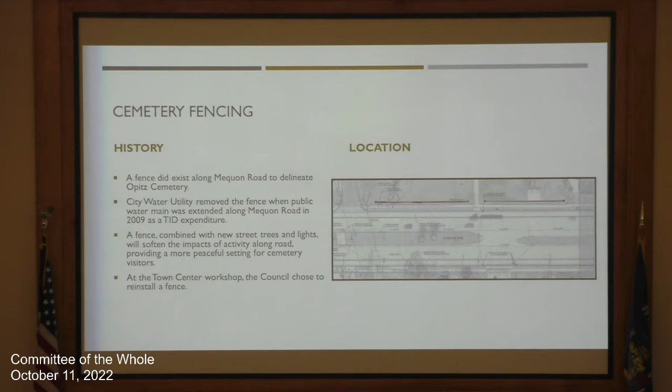As part of our workshop last year, the council, there was consensus to replace the cemetery fencing that was removed at the time that we extended the public water main back in 2009. The TID made that expenditure for the water main. There will be a fence along with new street trees, street fixtures along that street edge, and certainly that'll help delineate that portion of the block that doesn't otherwise have buildings on it. But as part of the workshop, I think there was consensus that for those visiting the cemetery, it would be really nice to have that barrier and buffer again of a fence.

There was, I think, some suggestion at that meeting that we do something a little bit different than our existing town center fence, that we use maybe an ornamental version of that. I did reach out to multiple people on the Historical Society, the library, to try to find an image of a fence in Mequon. It's not reading great on here, but the left picture is actually Freistadt, and it's across the street from where the hardware store is. So it's by Trinity. There's a little fence there on the corner.

This is back in the late 1800s. It was a wood fence. On the right, I think, is an example of kind of that vintage ornamental fence that you would typically see back in that time, at cemeteries. So we worked with a fence company to look at the option of what an ornamental fence would look like that would still be somewhat consistent with our existing fence. I just provided, just in case, sometimes these are hard things to look at or point out when you're driving or walking through, or to recognize, but there is implementation of that fence both in Mequon and in Thiensville.

Along similar lines, walls and railings, we have a very large and long retaining wall along Mequon Road on the north side, obviously adjacent to Spur 16, with all of the other infrastructure and greening that we plan to do on this corridor. We don't want this to look leftover and dated.

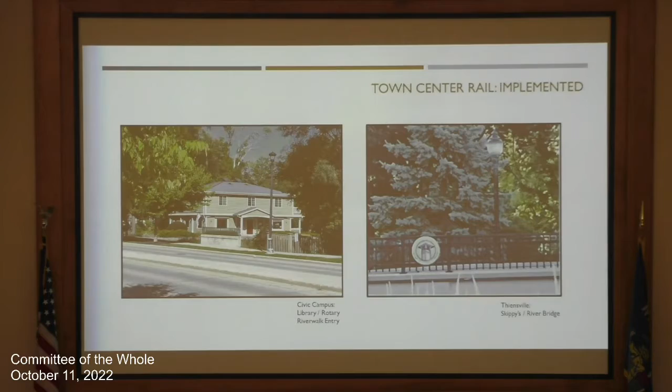So those are really just the walls and fencing. If the council would like to comment on that. Are there any comments on the fence?

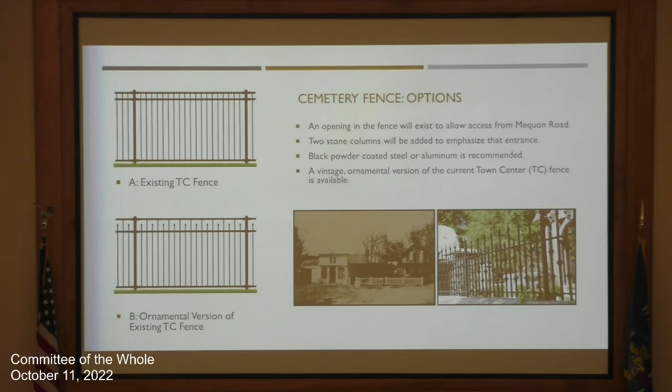Are you just picking between option A and option B? Yes, if someone has another idea and there's consensus on it, I'm happy to explore that. Let's keep it simple. We reserve the right to do that once in a while. Two options, right?

I vote for A. I vote for B. Of course you do. Okay, straw poll. Who likes... A is used in other places currently. I guess B is a good question too. Is it significantly different in cost? It doesn't look like it. No, it's not significantly different in cost. Do we just do it by the cemetery, or carry it throughout?

The ornamental one would go along the cemetery, and the rest we'd implement as the existing town center fence. The street frontage along the cemetery is just under 300 linear feet. Really, the cost difference comes between whether we want aluminum or steel. The fencing company recommends steel just because of all the lawn equipment. So this is in the price range of somewhere between $15,000 and $25,000 for the entire linear frontage.

The steel is more expensive. So am I correct in saying we'd have more consistency throughout everything if we went with A, but B is a little more ornamental for the cemetery? Correct. Okay, who likes option A? Show of hands. Let's go option A, because I'm practical.

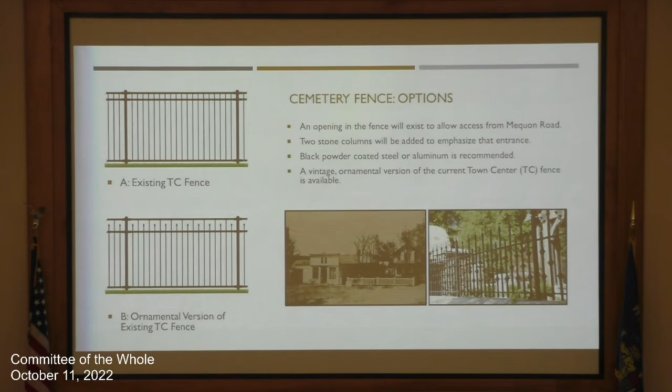Alderman Meyer: my only concern with B is that we have people who put their kids on top while holding them, then pulling them off. I don't know what the distance is between the arrow on top and the rest, but that's a little concern.

Should they be doing that at the cemetery? Well, just getting caught on it coming off. It's better than the old one on the right. You're going to get skewered there—that'd be worse. So this fence is in the 4 to 4.5 foot range.

Looks like we've got a consensus for incorporating something resembling option B around the cemetery. That's okay, so we made a decision. Right, on to the next one.

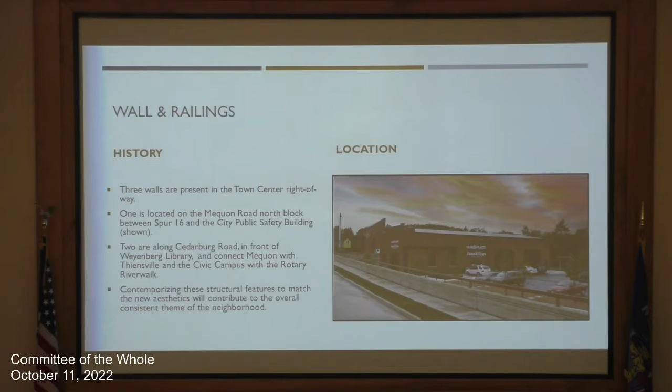So we debated a couple of different options for this. We talked about even looking at installing planters on top of the concrete cap for landscaping and vines to come down it. That can always be added if we choose not to do the guardrail. We do have some height and spacing limitations with the guardrail, from a safety standpoint of falling off the other end, which made the planters more complicated.

And if Kristen's still in the room, she wasn't super enthusiastic about the added maintenance. We kind of joked in our office that each of us planners would take a week in the summer to take care of the planters, with a contest at the end.

No, so we're looking to add that stone veneer. If there was to be prioritization of where to add the stone veneer, I would definitely choose this and the bridge location over the one at Division Street. But there is a Thiensville entryway with some stone right at Division Street as well that matches this look.

I think the stone looks sharp. I'm not sure what everyone's opinion is. I like it—it really dresses it up. I like it too, and that area currently is so singularly unattractive that it would really make a big difference there.

Did you say you would put lights on that, or no? We were talking about doing that at the bridge, but I do think that's an option here too, because I think that would make it more attractive.

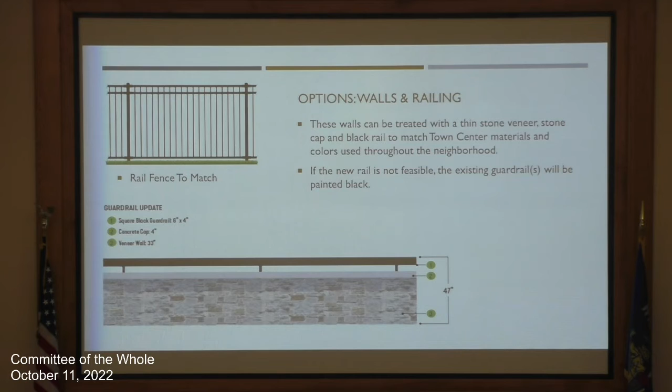I thought that adding lights there would highlight that area.

Is there a feeling on the planters? Kim mentioned she thinks they look nice, but could end up being a bit of a maintenance hassle. I think you're right, it might be a maintenance struggle, and an unkempt flower area is worse than none.

Does everyone sort of agree with that? Alderman Parrish? I agree with the planters. Depending on cost, I think Alderman Hanford's ideas would be interesting to see.

The lighting could look good there. Yeah, I agree, it could look really nice because that's a long stretch. And that's steel on the top, correct?

Really the same thing here. I guess I could have included this in the initial summary. Not much we can do with the bridge, it's regulated and permitted by WisDOT. Any structural elements that would add weight, including the median, since the median is actually part of the bridge, could result in a structural analysis.

So we're trying to look at really minimal, aesthetic ways to dress this up. Even if we pursued a different railing at this location, it would have to be a certain grade, WisDOT approved, because of the river. So the idea here was to keep the existing railing painted black to stay consistent with the rest, and then add a thin stone veneer since that won't add much weight.

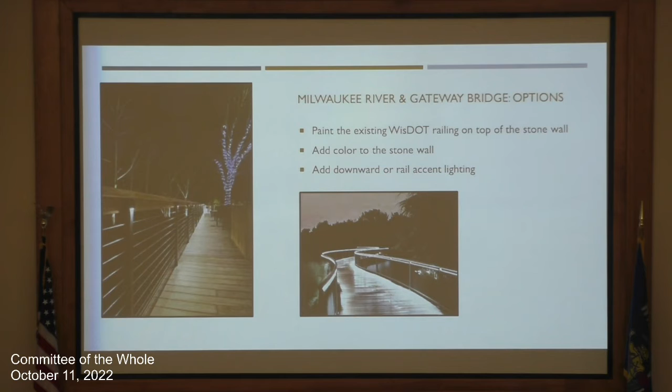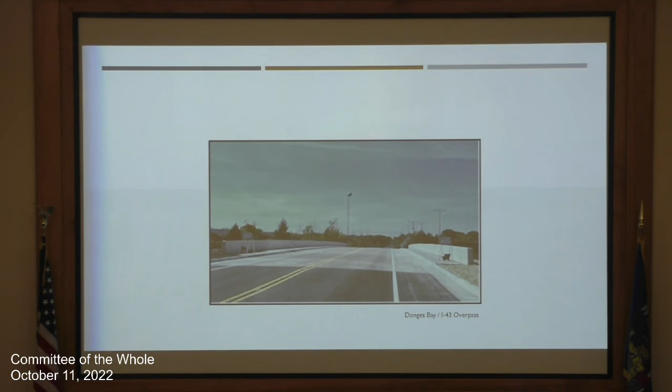As part of that gateway bridge, section number 1 is the concrete median. This is where we could do structural gateway and entryway features if we're not successful in adding anything green there. The existing median at number 2 is immediately to the west of that concrete median.

I think we've already done some planting there over the last week, and we can replace the very tall light fixture — you can see the two-armed one just below number 2. On section number 3, the grassy terrace area in front of Riverside, we can add our typical streetscaping pattern with street trees and a light fixture.

We should be able to dress up section 2 because it's already a grassy median, so that shouldn't be an issue with WISDOT.

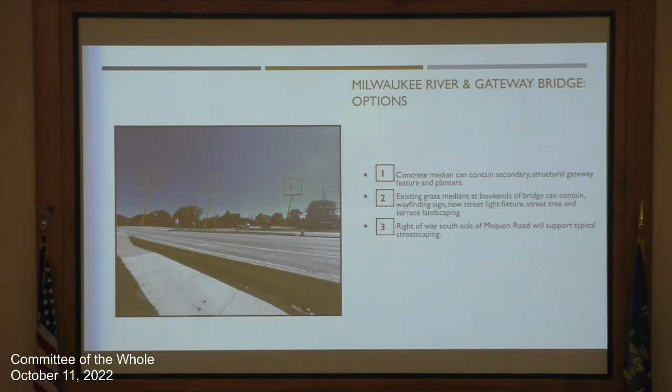Looks good. Is there any feedback, Alderman Parrish? Thank you. District 6 used to cover the bridge here, so I would get occasional comments that we discussed at Public Works maybe a year and a half ago, just about how to make the bridge safer.

And then we said, oh, we're going to be doing this a few years later, so this would be one time to talk about other things. I understand there are a lot of pedestrians on this bridge, and we're hoping more will go there, especially high school kids after high school, going on the sidewalk. Can you go back a couple slides?

That's good. You can see how close the traffic is to the sidewalk. It feels very close. There's very little we can do about that because of the DOT, but I wanted to suggest two ideas.

One was to install accent lighting bollards, one on each end, so in this case we'd be looking straight at one, basically not on the bridge but right on the outside of each bridge end. We can't do a fence or anything, but it would feel like it would create some separation.

We also talked about reflectors, which Dale brought up for this area along Main Street — how we'd like to do those here, but not on the bridge for a variety of reasons. And we talked about different types of paint, like reflective paint on the curbing, some way to differentiate, because there's no green or separation from the sidewalk to the road. Painting the curb could create some more separation.

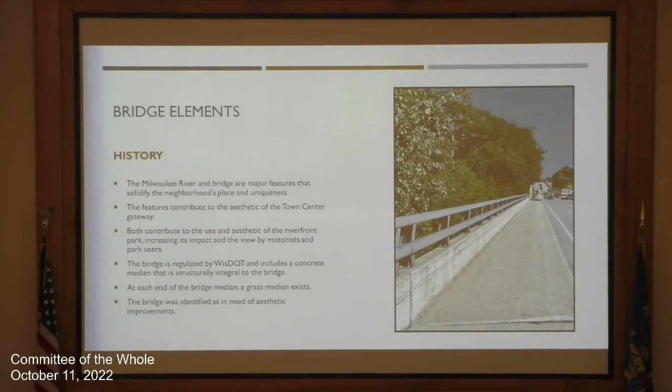Alderman Strelchak: Just wanted to say that everything you've come forward with so far has just been excellent. I like the veneer, I think it's going to dress up the city in multiple places, and I like that you're tying it in two different places, one within town center and one as you're getting to it. I support Alderman Parrish's recommendations on the bridge.

We do have paint on this subject, and we also have paint on an upcoming one that we're going to talk about in the crosswalk. I do want to caution you that paint gets very slippery in the rain, and it gets very slippery in freezing conditions. So as we're painting things, let's please keep that in mind.

I've been riding motorcycles since I was 12, and I raced off-road, so I pretty much know what I'm doing. The one time I did go down on a bike was at a crosswalk making a turn in a damp condition - it wasn't raining, it wasn't wet. It was a condition I didn't expect to be as slippery as it was, and it was a painted crosswalk. So as we're trying to create a safer town center, I would highlight that for other people.

Especially as you're walking across this bridge, if we do paint the edge, which I do support and agree with, I would recommend that on the flat surface it doesn't come in as far, because I'd hate to have somebody slip off of that and actually fall into traffic because of something we tried to put in place to make it more safe.

Alderman Meyer: I think that if we do get the lighting along the railing, at least at nighttime, it would help with designation on the sidewalk for Alderman Parrish's idea to highlight that over there, which I think is correct.

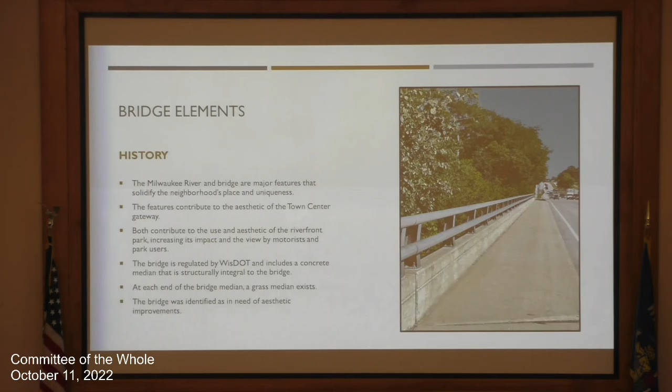This would be kind of a cool effect, hanging over the edge. I wonder if doing something along the river edge would get us a similar effect down in the riverfront park area, even though it wouldn't be up on the bridge - or uplighting from below.

I can have another round of conversation about that. Any more feedback on the bridge, or are we ready to move on to the next topic? Feels like we're ready.

Okay, so the OIT crossing, this has really been the impetus for being able to make some of these other changes, narrowing down the road. I think we all probably know what it looks like, but it kind of helps serve as a mid-block symbol to what I think the neighborhood's unique theme is.

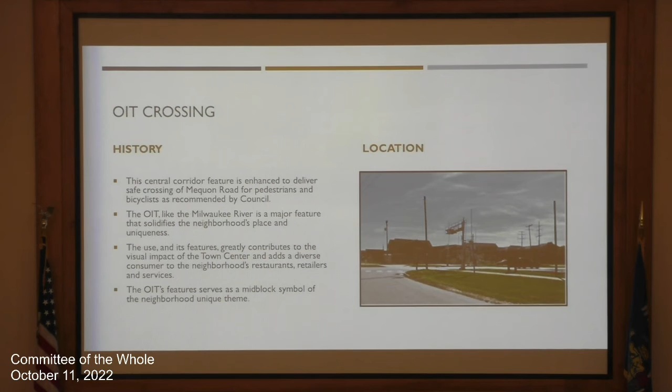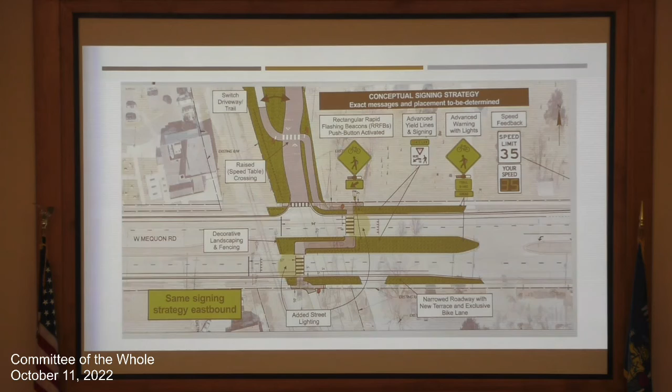And then we explored opportunities to provide a secondary, albeit smaller, gateway image to kind of hit that rhythm or element throughout the neighborhood. So two options that we looked at were this one and then the reverse of that. We did explore some that were vertical, but we were concerned about the vision both into and out of the crosswalk. And then we looked at some more traditional styles, but they were just too far removed from the gateway feature at the intersection of Mequon and Cedarburg Road. So really the distinction between these two that you're seeing is just that signage.

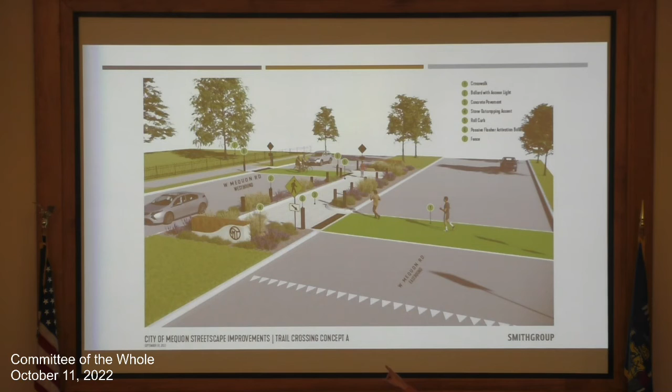So this will be option A, the one with the wood on top. Option B will have the concrete on top. Who likes option A? And option B? Looks like option A sort of went well. Dale's an odd man out, but whatever, that's okay.

Alderman Strelchek: just really quick, if we pick whatever option's shown here, whether that's A or B, that logo is really far down on there, and people are going to go through like, what kind of idiot would plan to put a logo right behind bushes. So as we're doing the landscaping, we need to keep that in mind.

I do like the other version, I think you just shift the logo to the left and still be on the rise, because it creates a bigger visual barrier for motorists as they're coming here, with the white being a little higher. But I don't care either way. We did talk about landscaping at the base. The other thing is that we are going to attempt to get a halo glow behind the logo as well. The lighting will be nice.

How do people feel about the crosswalk? Seems to be a little bit of momentum behind green, if it can be green and it's the right safe material or texture. Yes, okay. Looks like everyone's maybe kind of liking the green.

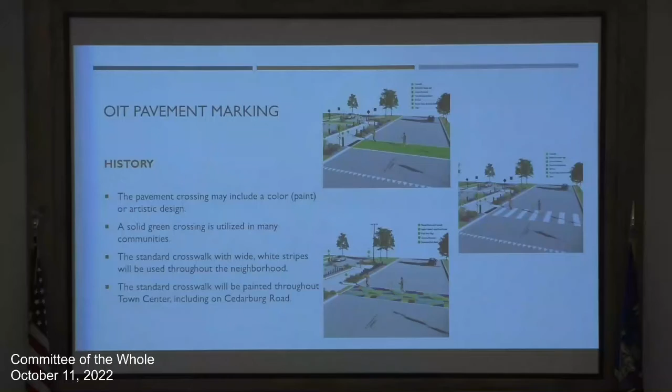This was the next one, after the crossing, just to show you the comparison of the three. I mean, I don't think we would do the artistic one on the bottom left, but that's just an example. I don't think we would use that pattern or that color, but it's just to show that you can do anything you want, there's infinite options there. I don't think we can handle that.

Yeah, we need a whole nother meeting. And it would get dated pretty quick, no matter what we chose. And the triangles would be part of it either way. No, you could do anything you wanted. I mean, I do like the triangles, I want to make sure those are included.

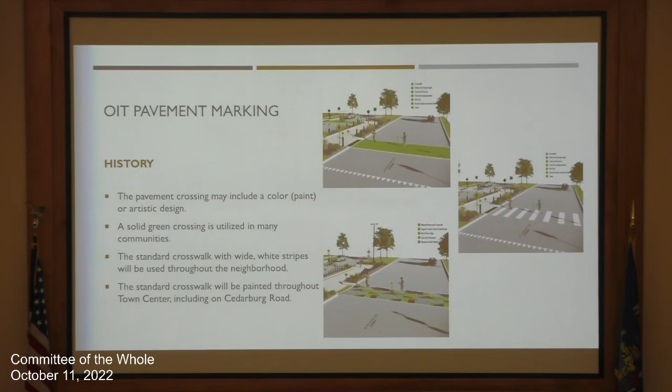Oh, I'm sorry, I thought you meant the triangles in the graphic. No, yes, yes it is, those are included. Good. So consensus is green, and then I think we had a texture decision, you can get it. There's a detail there to pick at, but I think it's an important one. What's next? Okay.

So what's next is the gateways. This will help you go back to the other one if you want to see anything different. This is on the corner of Buntrock and Mequon Road, on the southwest corner in front of Aurora, across from Foxtown Brewery. Here we would do a vertical element.

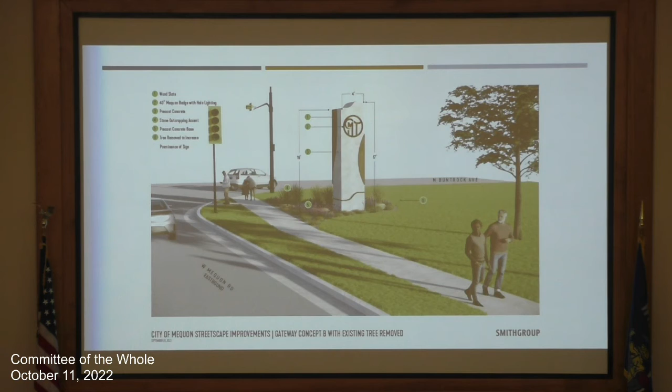These are the two that we landed on. The top one has a curved edge to the top and the bottom, and it has a similar stone veneer at the base, and obviously has much more concrete. This one, same thing, has the stone base, does not have the curved edge, and has the wood slats. Again, we would look to do a halo glow here behind the logo.

Was there any concern about too much massing on the street? It's just a very large structure. Jack and I went out there multiple times.

We took a measuring stick out there, and we have come down in the height of this since it was originally proposed. There's a pretty significant row of trees on that side, and when you compare that with what we expect to see as the traffic signal there, we've landed at somewhere between 12 and 13 feet in height for this. Okay, so it won't be 17. Yeah, perfect. 17 was a little high.

Is there any preference one way or the other between the two? Which one do we like? The one that's shown here has the wood more prominent, and here's B. So do we like the wood more prominent or the concrete more prominent? Looks like the wood is in the concrete. You would like the concrete, and we got one for the concrete.

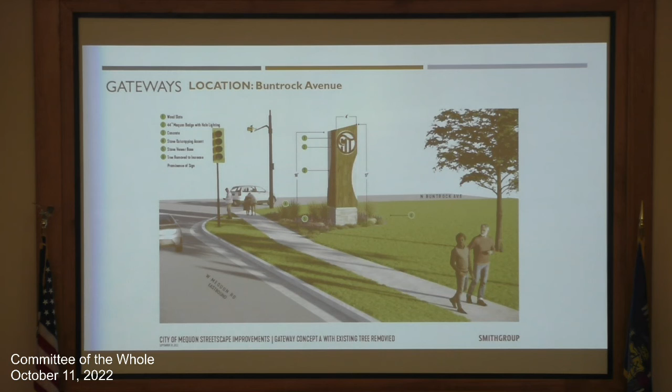Outpost has a wall with their pavilion out at the corner. We had secured an easement on that wall if we ever wanted to put some signage for town center or welcome, something like that, so we could explore that. I like tying something in there at that corner. Okay, so option A, this one is the choice, and duplicate that by the bridge.

Okay, what's next? Keep her moving. Okay, this is just a close-up of the other two signs. This is the example of the secondary one. So this one wouldn't be at the bridge because you like the other one better.

We were talking about doing a very smaller scaled one at the public safety building, really as you're exiting town center. Because as you're leaving the Mequon Cedarburg Road intersection, you'll see the one on the river. So this is one to kind of end cap as you exit the neighborhood.

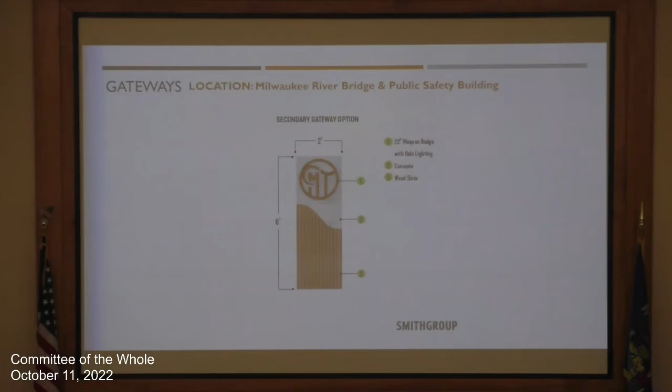So where is that again? This would be at the Mequon Buntrock intersection, on the corner where the public safety building is. On the Buntrock corner? Yeah, the Buntrock Mequon Road corner.

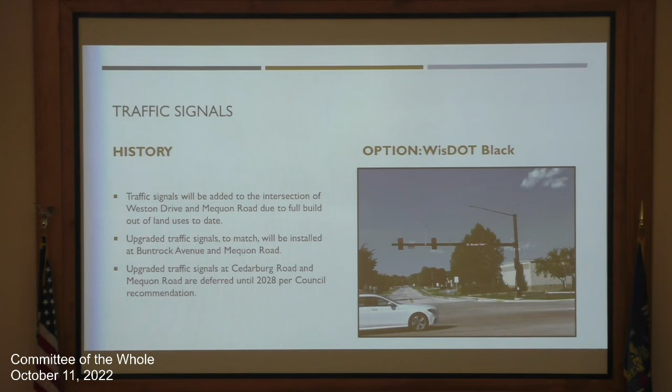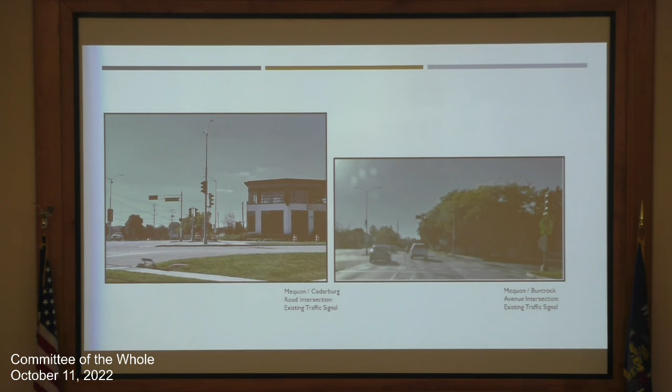This is just to show you what the infrastructure looks like at the existing intersections. At Mequon and Cedarburg Road, as part of the workshop last year, we deferred making any improvements other than enhancing the crosswalks at this intersection until the resurfacing project is done by WisDOT. We'll have the opportunity to upgrade these traffic signals at that time to match the rest of the neighborhood. We've always talked about adding brackets and banners to our new street lights. Cedarburg Road is an obvious location to do that, but I also think mid-block, or along the two blocks between Cedarburg Road and Buntrock, is another good opportunity to do something like this.

Perfect. Is there a consensus for these? Yeah, that's a good addition. Go for it. I think we're almost there.

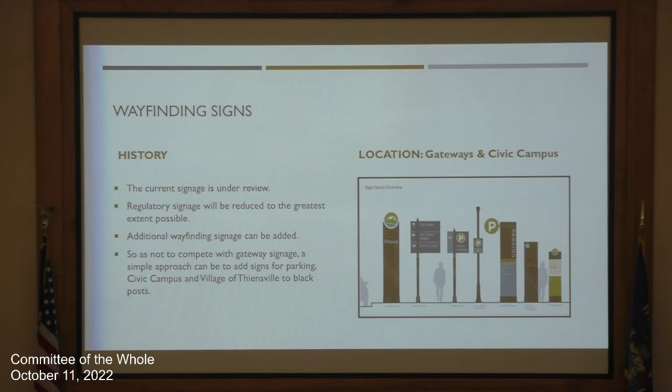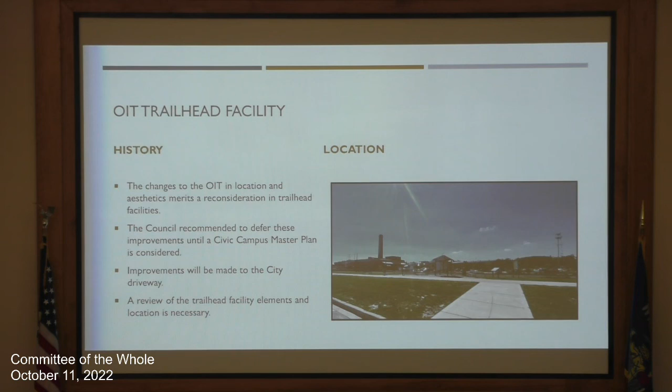And then the last thing would really be the Trailhead Facility. This is the location of our current Trailhead Facility, and it's got a lot of random fixtures as part of it. We did defer this at our workshop until the Civic Campus Master Plan is contemplated. There are going to be improvements to our driveway - the driveway from the former Logemann Center to Mequon Road is being shifted over. We're going to have the designated OIT crossing our driveway much sooner than where we've got our new sidewalks and new parking lot.

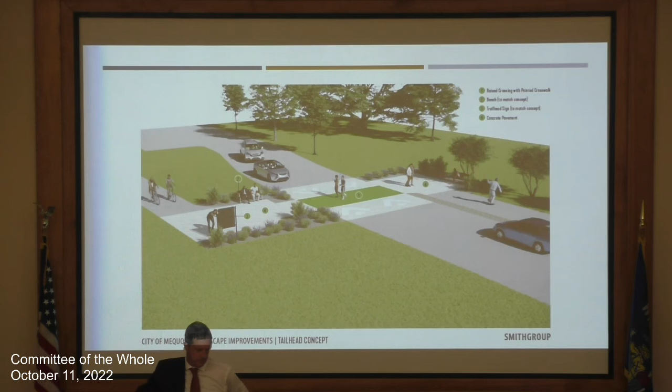So the consultant did go through this exercise of a trailhead concept. We don't have to make decisions about this right now. I just wanted to get this in front of people and get people thinking about it in advance of the civic campus. I don't think we're going to have the kind of excess dollars in the budget of this project to tackle this right now. If for some reason we did, and it became something we thought we should address, we'll definitely bring it back to you. If there aren't any other questions, thanks for working through those, and I'm happy you guys know what to expect next year at this time, hopefully what will be out in the street.

Alderman Parrish: Thank you, Director Tollefson, you've done a great job with this presentation. We all appreciate it. I think the community is excited as well.

Would you mind blowing up the sign? I had it off before the meeting. I brought this up with Kim - when you see MT, I'm not sure what you think, but a lot of people driving through will think Mequon, Thiensville, and I believe our intention is to be saying Mequon Town Center. I just wanted to suggest we consider something like MTC, or something all new altogether, that doesn't have any confusion whatsoever about whose downtown this is, unless there's reciprocal signage going both ways, which I don't think there is.

I know we approved this on the corner and we have to stay consistent, and I wasn't part of that conversation, but now this is the rest of our town center. This is Mequon's town center, and it's not very clear to me. I think if we go back to the original concept for town center, it was a Mequon Thiensville town center where Mequon would just blend into Thiensville, and for some practical purpose it becomes one.